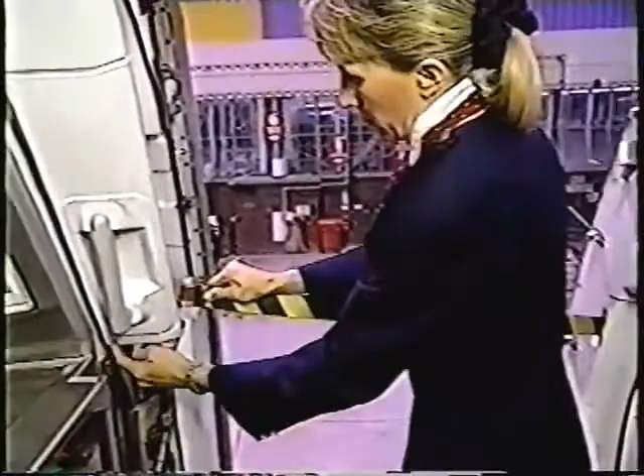Push the door out and forward against the fuselage. Use the door assist handles. Ensure the gust lock is engaged. Once the captain has given permission to close the doors, push down on the gust lock to disengage it. Use the door assist handles to slide the door fully aft and then inward slightly.

Rotate the door handle to the closed position to close and lock the door. Verify the door is properly closed by ensuring the door locking indicator reads locked. When the bridge starts to retract, the CSD will instruct the flight attendants to arm the doors.

Prior to arming a door, depress the pin head to pull the pin out of the arming lever. Stow the pin in the slot on the door and fold the streamer so that it is free of the door hinge. Then arm the door. Push the arming lever down to the armed position. Verify the door is armed by checking the arming lever is in the armed position.

The slide mode window reads armed. Remember to complete the procedure. Walk to the opposite door and verify it is armed. Confirm to the CSD that your door is armed and cross-checked.

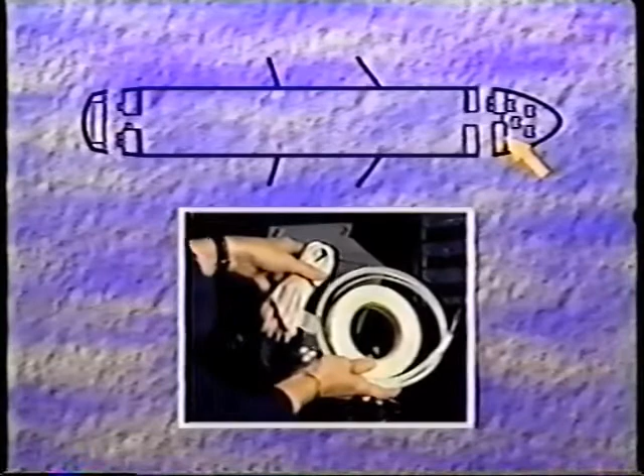Now let's look at the location of emergency and safety equipment. We'll begin on the flight deck. Behind the first officer's seat is a restraint kit for security purposes. For firefighting, you will find a fire crash axe and protective gloves. Behind the captain's seat, there is a halon extinguisher.

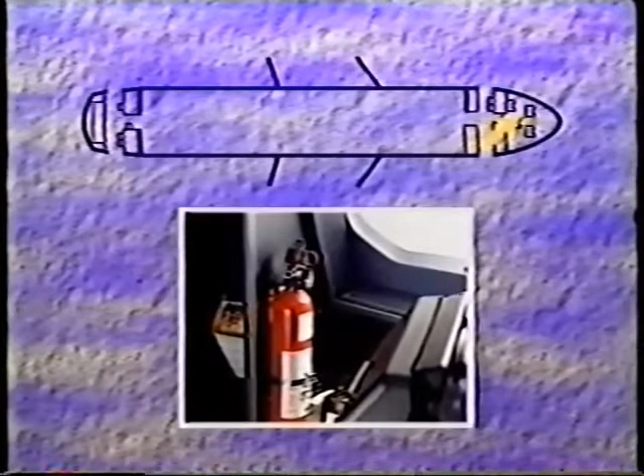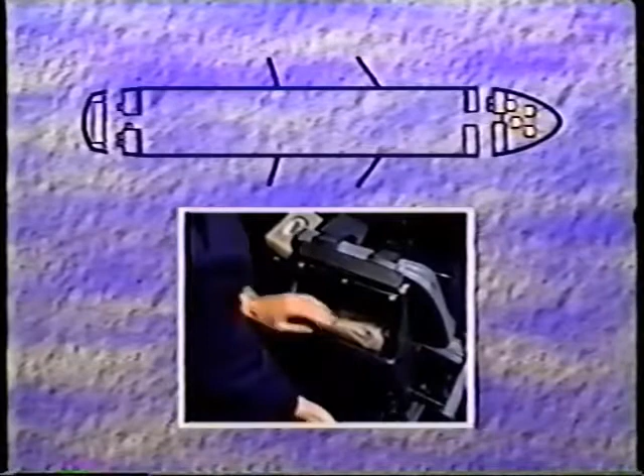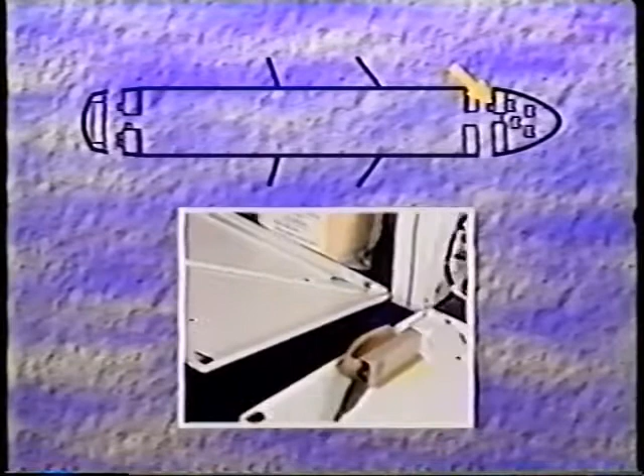In the closet behind the captain's seat, there is a search mirror and a smoke hood. There is a life vest stowed at each crew seat. Beside the jump seat at 1L, there is a megaphone. In each compartment under the double jump seat at 1L, there is a manual release tool.

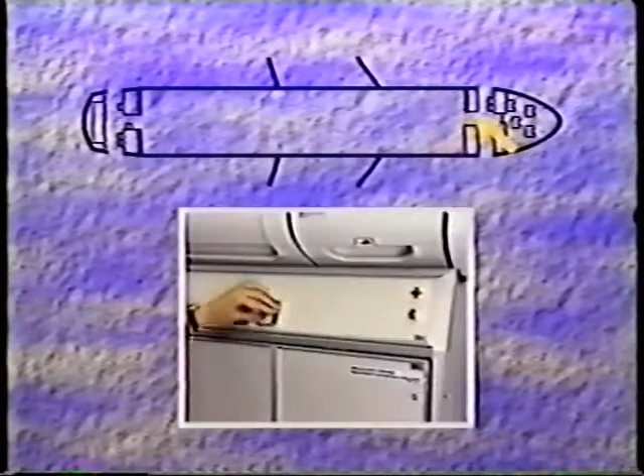In the first overhead bin at 1L, there are 2 portable oxygen bottles. In a compartment above the forward closet, you will find a smoke hood and a first aid kit. Beside the forward closet, there is a halon extinguisher and a portable oxygen bottle restraint pouch.

In the aft overhead bin, left side, there is an emergency medical kit, a megaphone, and 6 adult-child life vests. In the next bin are 7 infant life vests. In the left and right doghouses, behind the last row of seats, are smoke hoods and portable oxygen bottles.

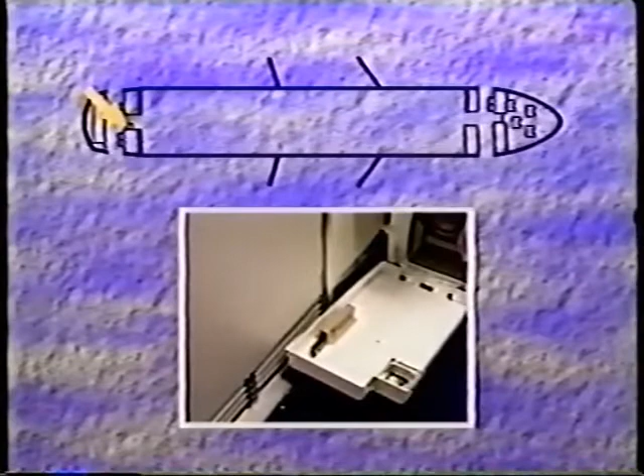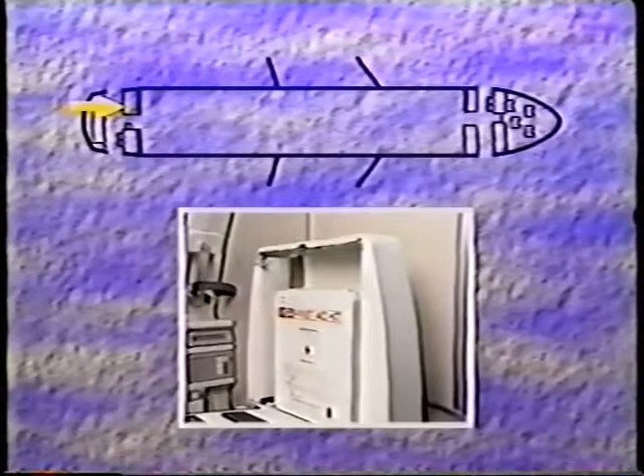Under the center aft jump seat, there is a manual release tool. In a compartment behind the jump seat at 2L, there is a halon extinguisher. A first aid kit is located in the headrest. Under the jump seat at 2L, you will find 1 manual release tool.

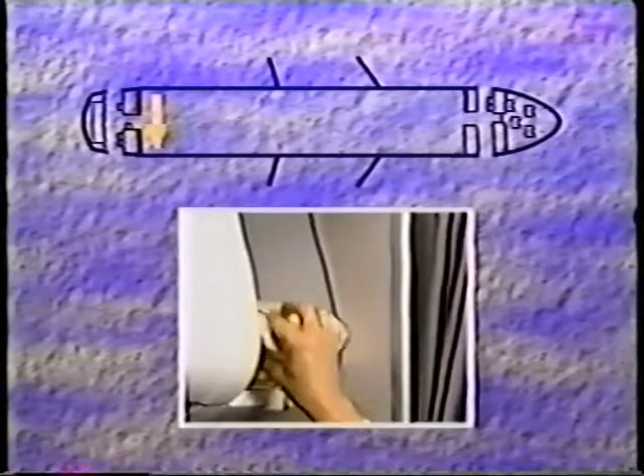In the overhead bin, last row, right side, you will find 8 infant life vests. Under the jump seat at 2R, there is a halon extinguisher and a water extinguisher. Every flight attendant jump seat is equipped with a flashlight and a life vest.

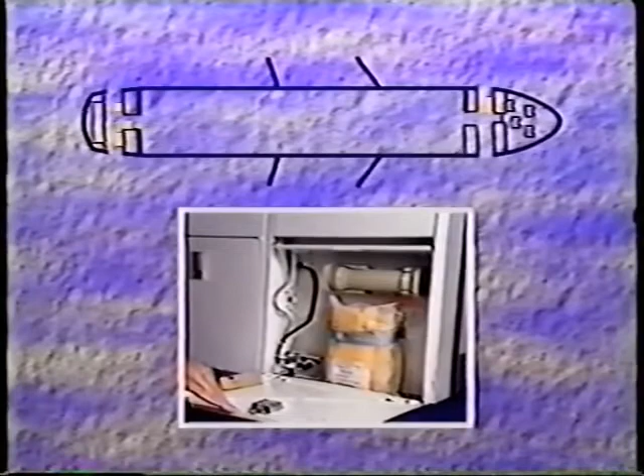Now, let's have a look at the oxygen systems on the A320. The flight deck masks are enclosed in a compartment at each seat. To operate, squeeze the red levers to remove the mask. Place the harness over your head with the mask covering your nose and mouth. Release the red levers to allow the oxygen to flow. Each mask incorporates smoke goggles.

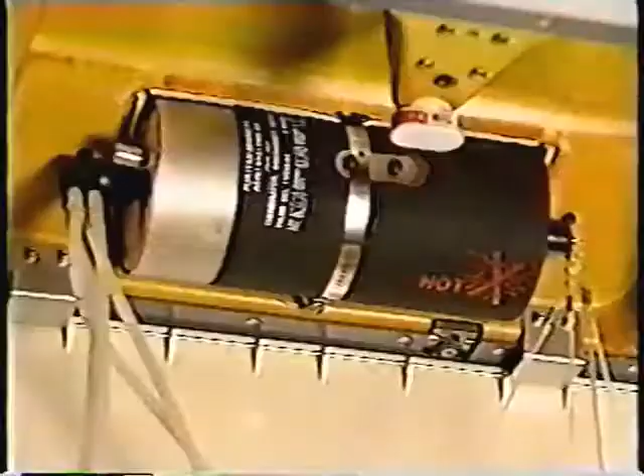The passenger cabin of the A320 is equipped with chemical oxygen generators. Pulling on one mask releases a pin, which activates the generator to allow the flow of oxygen to all masks attached to that unit. Once started, the flow will last for approximately 12 minutes and cannot be turned off. Oxygen flow is confirmed when the inline flow indicator is visible.

If an oxygen compartment fails to open, it can be opened by inserting the pin end of the manual release tool into the hole in the compartment door to release the latch. If the manual release tool is not readily available, use a pin or sharp object.

Emergency communication procedures on the A320. When you hear the 3-chime signal, the final warning to the cabin crew to be seated, flight attendants must pick up the handset, press the reset button, and re-stow the handset.

For flight attendants to contact the flight deck in an emergency, pick up the handset. Press the Emer call switch once. Indications on the flight deck of this call are a series of tones. The emergency call and the ACP yellow attendant lights will illuminate. The series of 3 chimes will not stop until the call is answered.

There is an evacuation signal system panel on the flight deck at door 1L and at door 2L. Any one of these panels may be used to initiate an evacuation. To initiate an evacuation from either of the cabin panels, press the command button. Upon hearing the signal, silence the horn and conduct the evacuation.

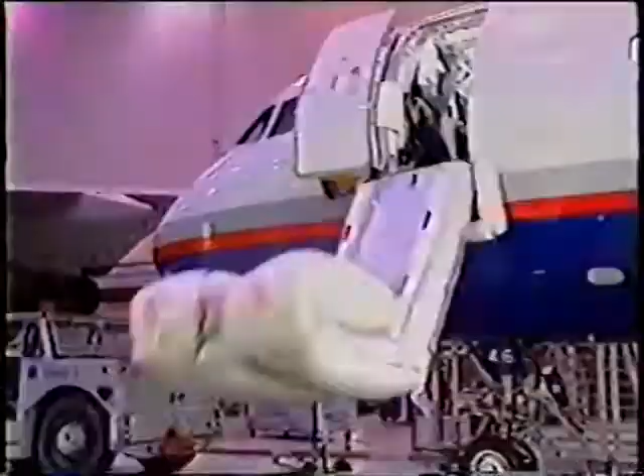To open the door without slide inflation, assess outside conditions, disarm the door, rotate the door handle to the open position, and using the door assist handles, push the door out and forward.

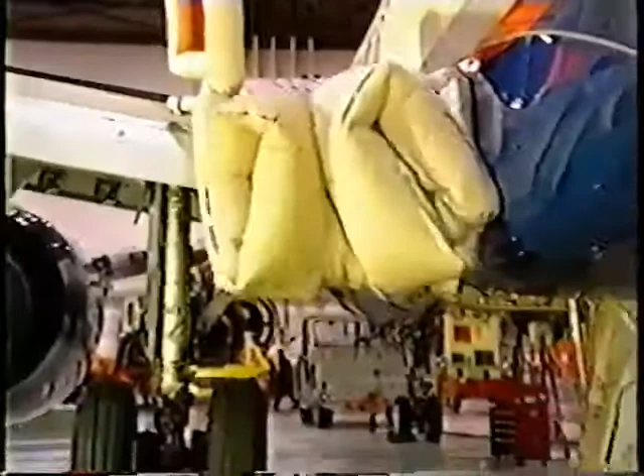To open a window exit, assess outside conditions, remove the upper handle cover, pull in and down on the upper handle while grasping the lower handhold. Turn the window sideways and throw it out the exit opening as far forward as possible. If the slide fails to inflate, pull down on the manual inflation handle. Visually check to ensure the ramp slide is inflated by looking aft, outside the aircraft.

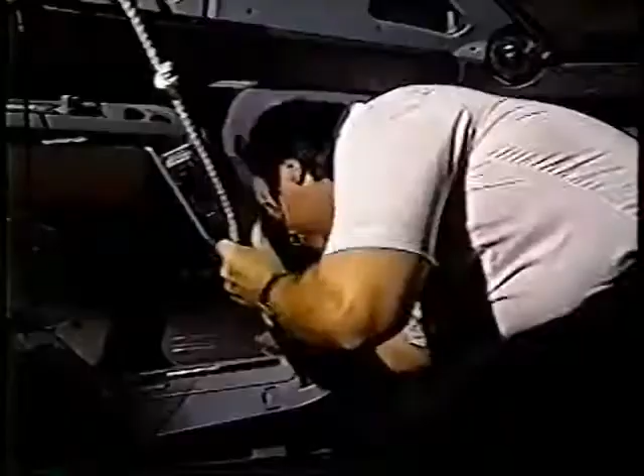Although highly unlikely, it may be necessary to evacuate through the flight deck windows. To open a window, depress the button on the handle and rotate it aft. To evacuate, pull down on this access cover. Throw the rope overboard and climb down. To exit, put one leg out first, followed by your body. All exits may be used in a land evacuation.

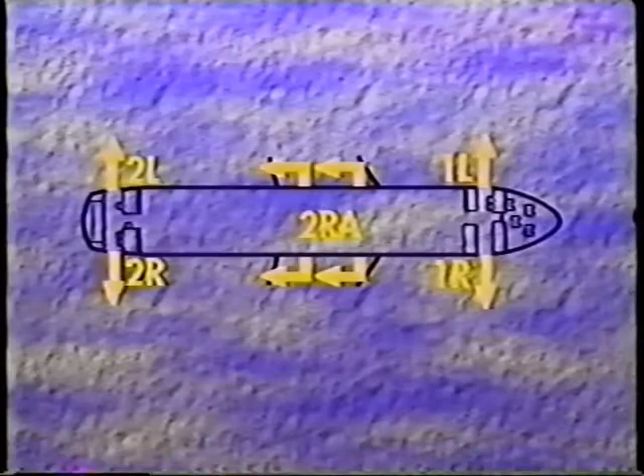The responsibilities of the captain and first officer include completing the abnormal and emergency checklist, giving the evacuation signal, assisting with the evacuation as required, and evacuating through the flight deck windows if necessary.

Position 1L, the CSD, sits at the outboard jump seat at 1L. If necessary, 1L will activate the emergency light switch, which illuminates the emergency lighting system. 1L will assess and open 1L, conduct an evacuation, and must also check the condition of the flight deck crew. 1L will evacuate themselves after removing the forward megaphone.

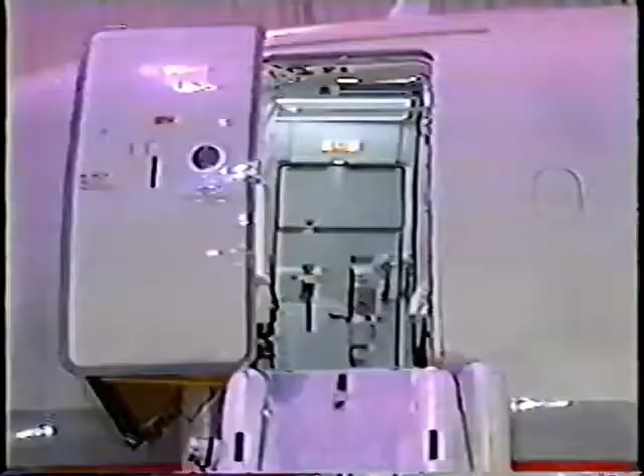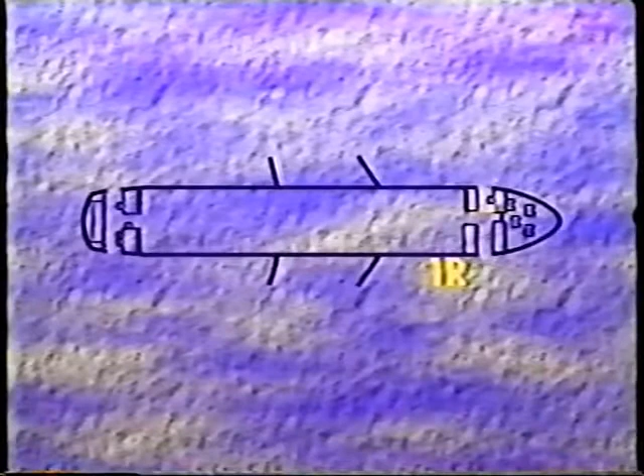Position 2L sits at the jump seat at 2L. 2L will assess and open 2L and conduct an evacuation there. 2L will evacuate themselves after removing the aft first aid kit. Position 1R sits at the inboard jump seat at 1L. 1R will assess and open 1R and conduct an evacuation. 1R will evacuate themselves after removing the forward first aid kit.

Position 2RA sits at the aisle jump seat in the aft cabin. 2RA will move to the overwing exit area when practical. 2RA will open or direct the opening of the 4 overwing window exits if they have not been opened already by passengers. 2RA will evacuate themselves after removing the aft megaphone.

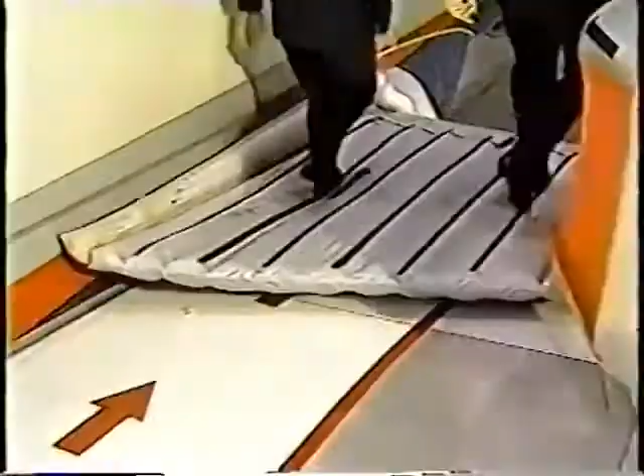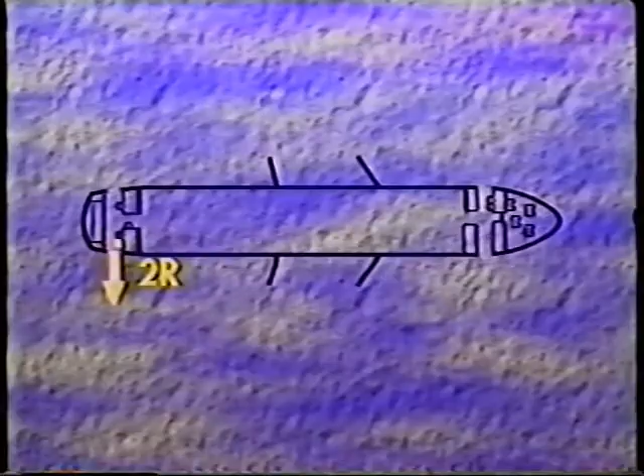Position 2R sits at the jump seat at 2R. 2R will assess and open 2R and remove the emergency medical kit. It is the responsibility of each crew member to remove their flashlight when necessary and do a thorough cabin check before evacuating.

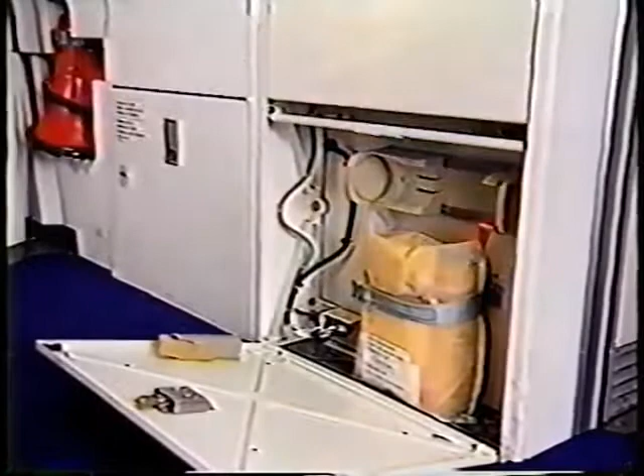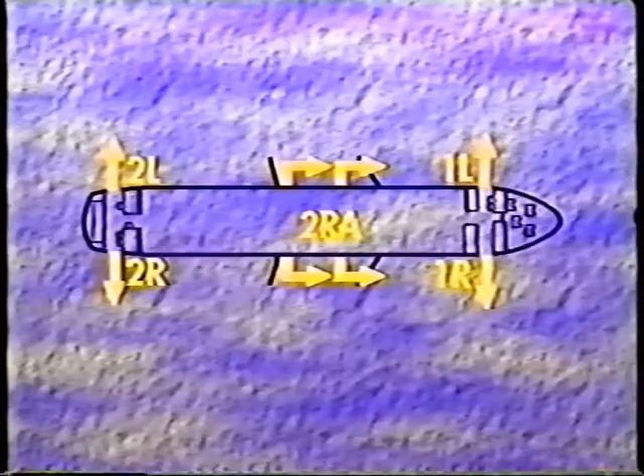On the A320, all exits may be used for a water evacuation. However, the door exits are the preferred exits as they are equipped with slides that can be used as hang-on flotation devices. All crew members and passengers will don a life vest. Passengers who use the door exits must be directed to inflate their life vest, jump into the water, and move away.

Flight attendants must direct passengers who use the window exits to step out foot first, inflate their life vests, and jump into the water from the leading edge of the wing. Passengers will then swim to the nearest slide. Once the water evacuation is complete, crew members will detach the slide, then inflate their own life vests, and jump into the water.

To detach the slide from the aircraft, lift the flap on the girt apron. Pull the quick release handle. Then disconnect the mooring line by cutting it with a knife. Instruct the passengers to stay in the water and hold on to the lifeline.